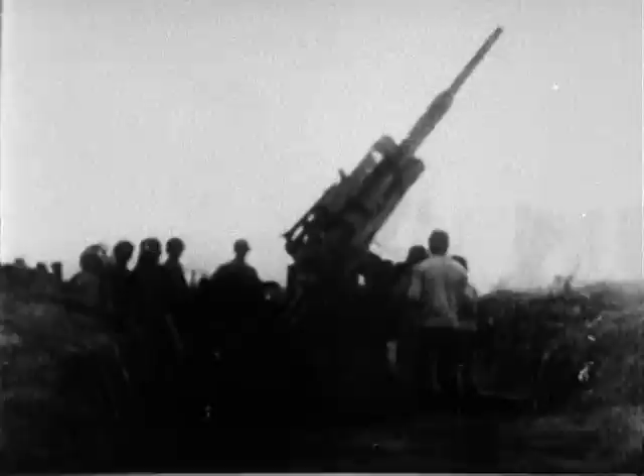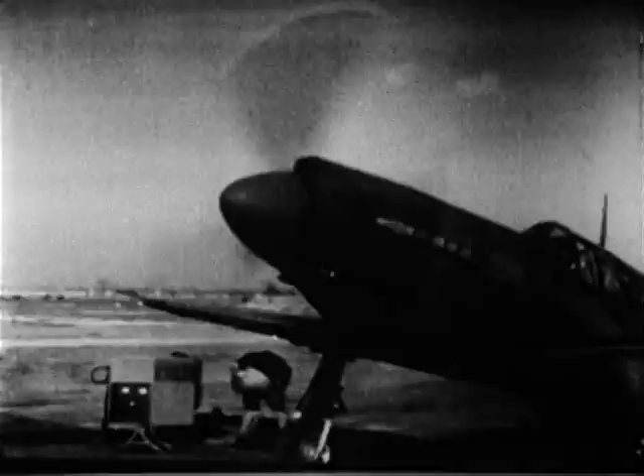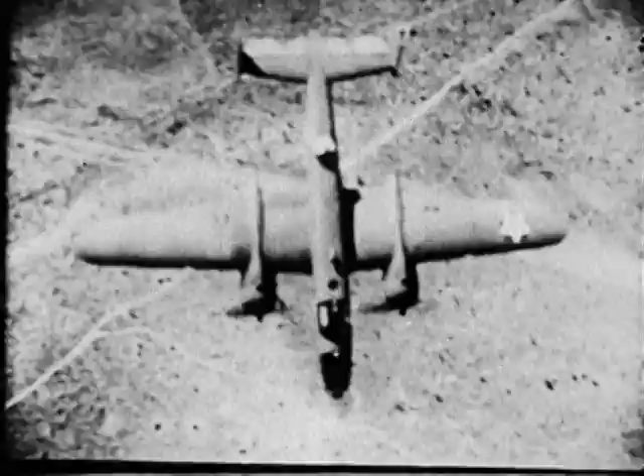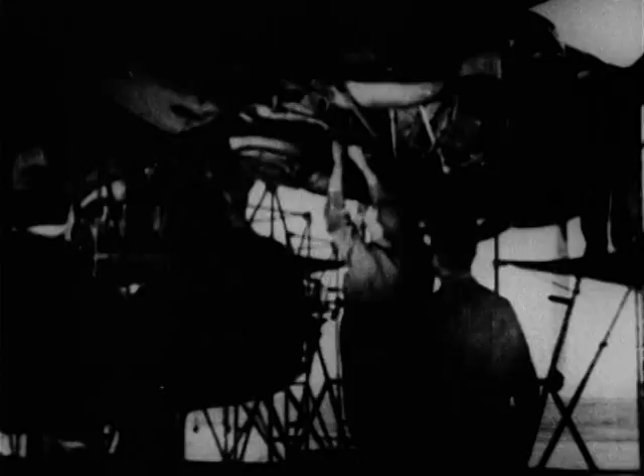All combat planes are equipped with gear-driven superchargers, which are built into the engines and driven from the engine crankshaft. These geared superchargers are effective up to medium altitude. At high altitude, the turbo supercharger is needed to provide additional pressure to maintain full engine power. With proper care in installation, maintenance, and operation, the turbo supercharger is extremely effective, reaching its full power and efficiency at 25,000 feet or higher.

This is the turbo supercharger installation in the B-17. Installations vary according to the different types of ships, such as the B-24, the P-38, the P-43, and the P-47, where it is submerged in the fuselage.

A turbo supercharger is driven by the terrific impulse of hot exhaust gases from the engine. It largely uses waste power.

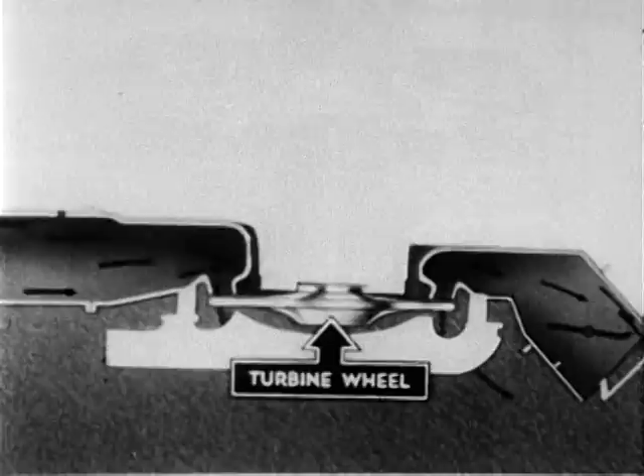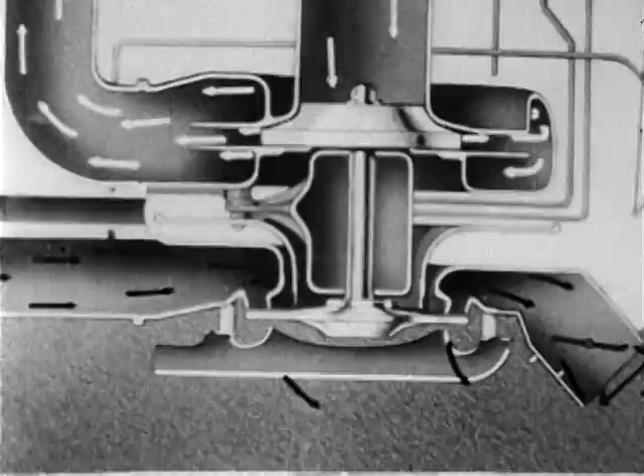Waste exhaust gases pour into the nozzle box, where they are directed onto a metal windmill or turbine wheel at 1,500 degrees Fahrenheit, with all the red-hot energy that implies. This blazing force spins the turbine wheel at terrific speeds, up to about 20,000 revolutions per minute. The turbo supercharger stands the gaff of almost impossible high-speed strains and stresses, and still performs its task at temperatures ranging from 1,500 degrees above to about 67 degrees below zero Fahrenheit.

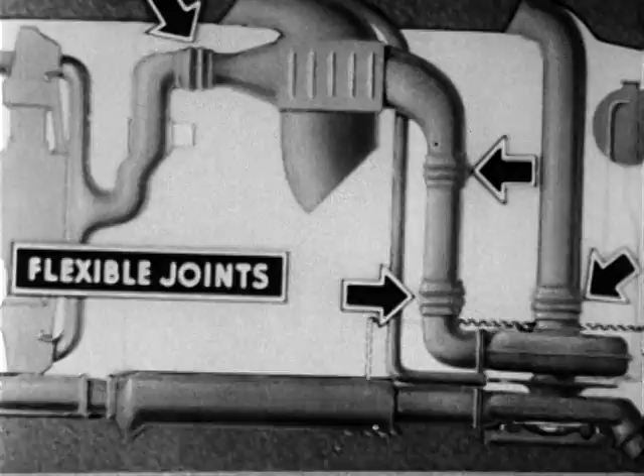The basic principle of all turbo supercharger installations is outlined in this diagrammatic drawing. Flexible joints are installed between the component parts to absorb vibration.

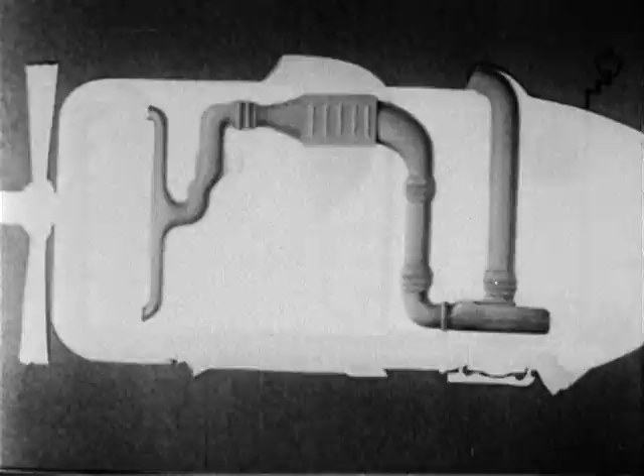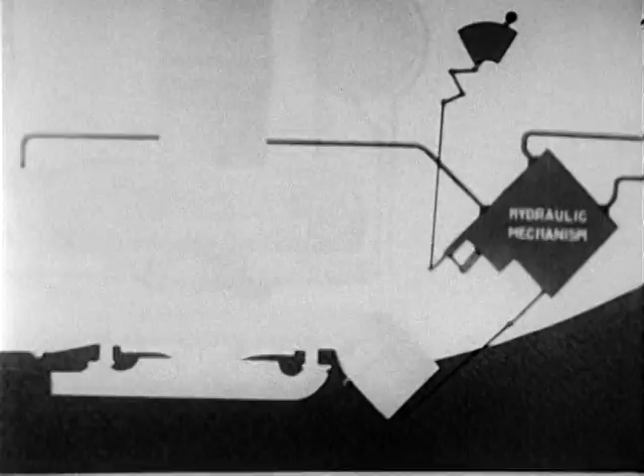For purposes of clarity, we will divide the system into 5 parts: 1, the induction system. 2, the exhaust system. 3, the ventilating or cooling system. 4, the control system. And 5, the lubrication system. Individual installations vary according to the different design of ships, but their functions remain the same.

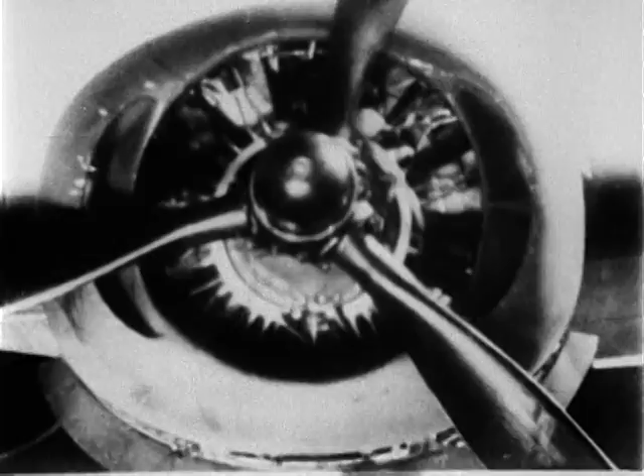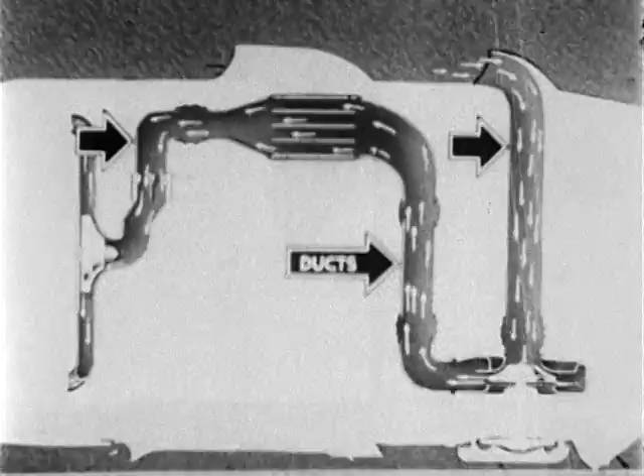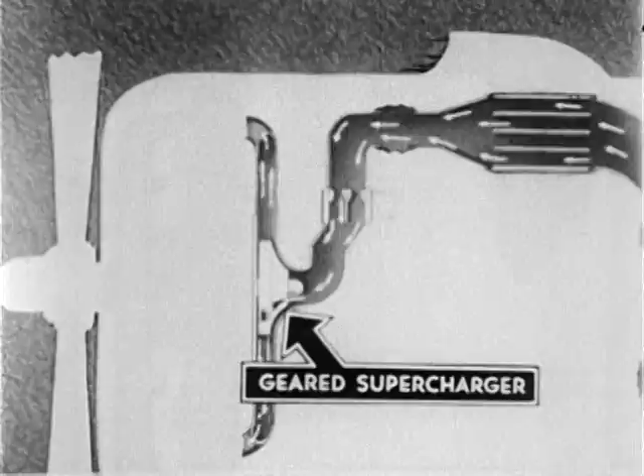The induction system comprises rammed air intake in the engine nacelle or in the leading edge of the wing. The speed of the plane rams air into these intakes and assists in keeping up pressure. Ducts carry this air to the compressor, where it is compressed and forced through the intercooler, and the carburetor to the inlet of the geared supercharger. The geared supercharger is used to do part of the required supercharging and to improve the distribution of the fuel charge to the cylinders.

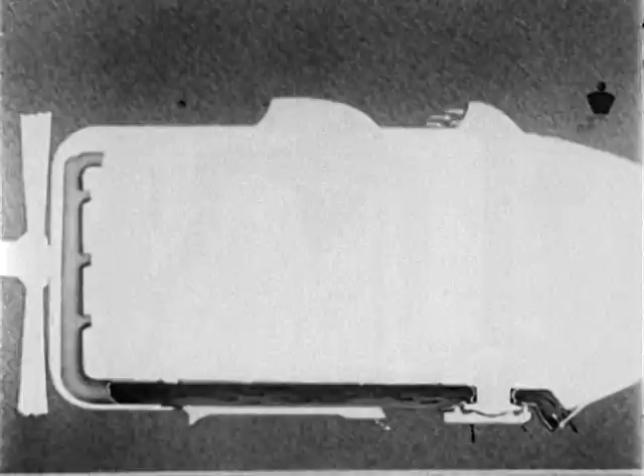The exhaust system takes the high-temperature exhaust gases from the engine to turbine wheels or out through the wastegate to the atmosphere. The cooling or ventilating system cools the supercharger parts, thus preventing damage due to the high-temperature exhaust gas.

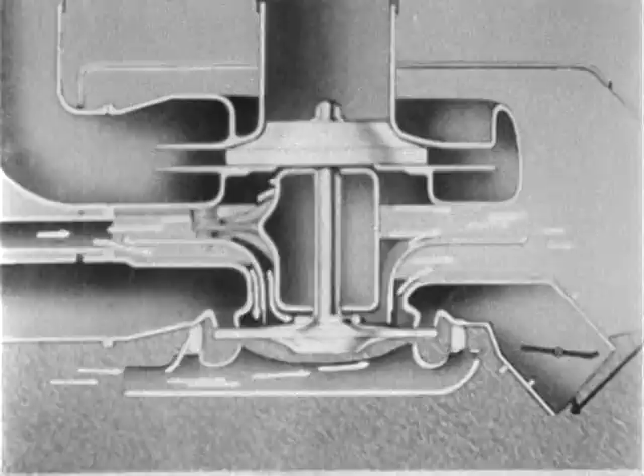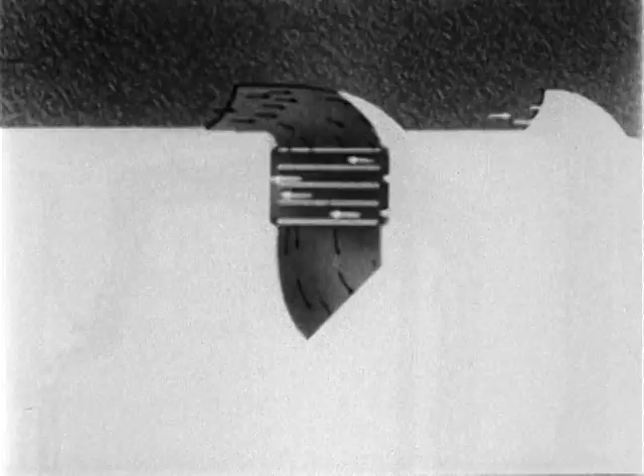Rammed air is carried through ducts to the turbo, where the stream is split by the baffle plate and cool air forced against the bearing housing, compressor casing, the back of the turbine nozzle box, and the back of the turbine wheel. Other ducts perform the same functions in relation to the exhaust stack shroud, which insulates the exhaust stack, and the air intercooler, which for proper combustion reduces the temperature of the air fed from the compressor to the engine. The intercooler cools air in the same way the radiator on your car cools water.

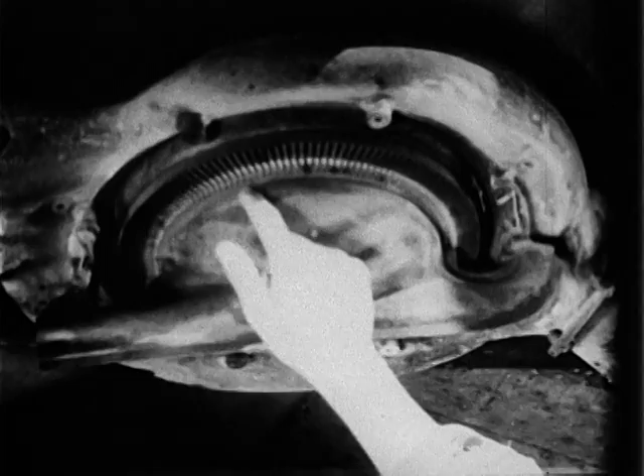The cooling cap supplies air to the rim of the turbine wheel to lower temperature of the wheel disc.

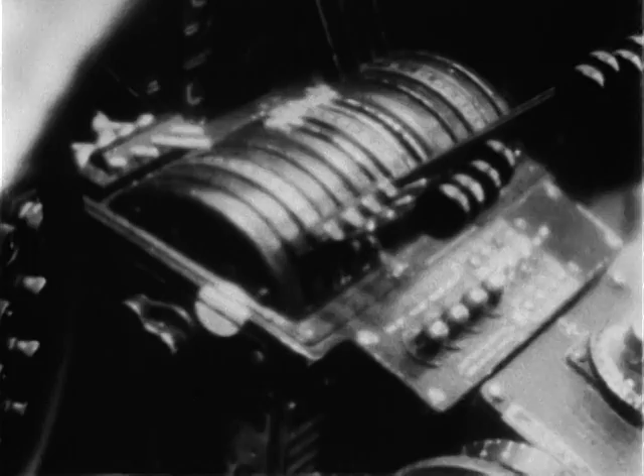The turbo supercharger is controlled by a hydraulic regulator, which operates the wastegate in response to pressure changes in the exhaust stack. The wastegate control is adjusted by a boost lever in the cockpit. The wastegate controls speed of the supercharger by bypassing the gases around the wheel. With the wastegate open, the turbine will idle. Closing it by degrees enables the turbo supercharger to operate at required speed.

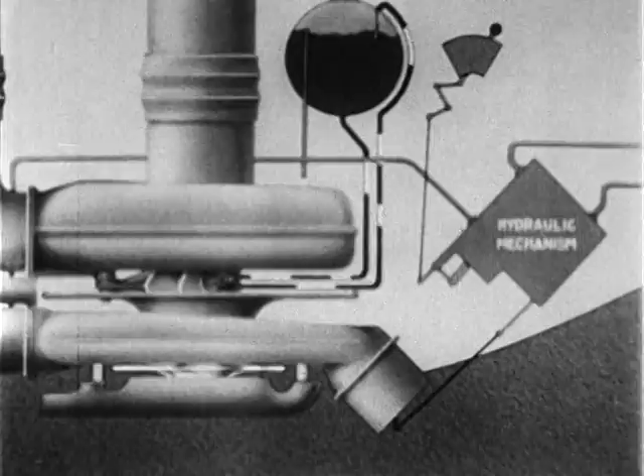Lubrication is accomplished by a gear-driven pump. One element of the pump takes oil from the tank and supplies it under pressure to the moving parts. The second, or scavenging element, returns the oil to the tank.

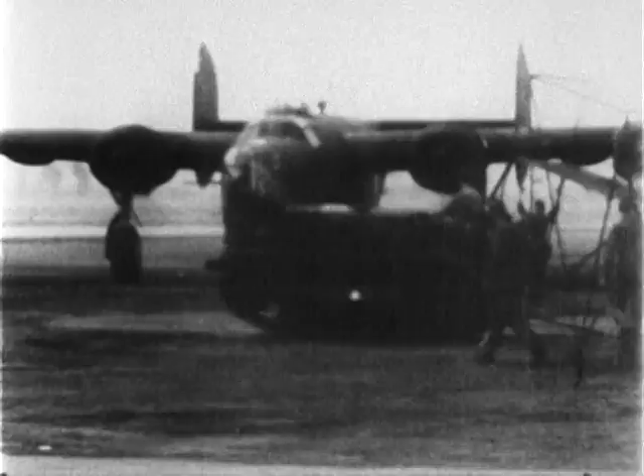When a ship comes in from a long, grueling flight, or even a routine operation, the pilot knows that the ground crew will assure the success of his next mission by a thorough inspection.

The inspection of the turbo supercharger installation is performed in accordance with Army Air Force's technical orders.

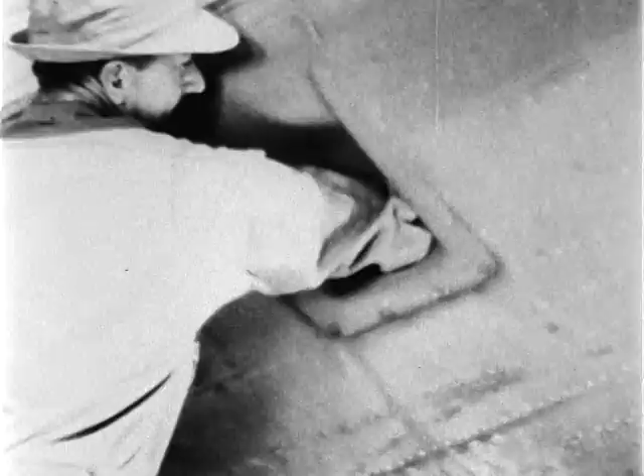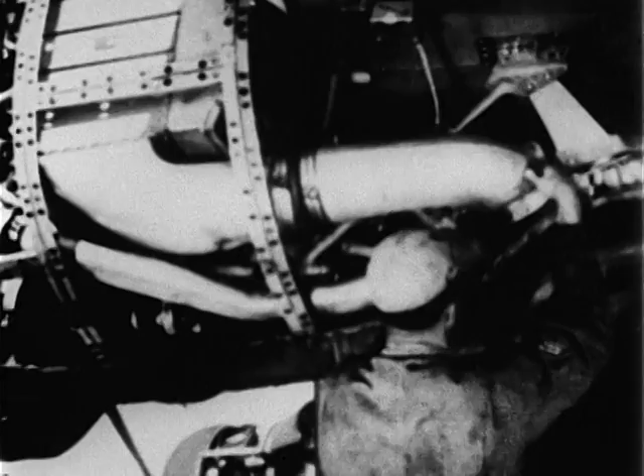Air ducts running from the nacelles or from leading edge of wing must be kept clear at all times. A piece of newspaper in a ram air duct will choke off cooling air, which is absolutely necessary for proper performance. Men are sometimes careless and step on louvers, blocking the flow of ventilating air. Ducting must be examined for broken connections, cracking, and chafing.

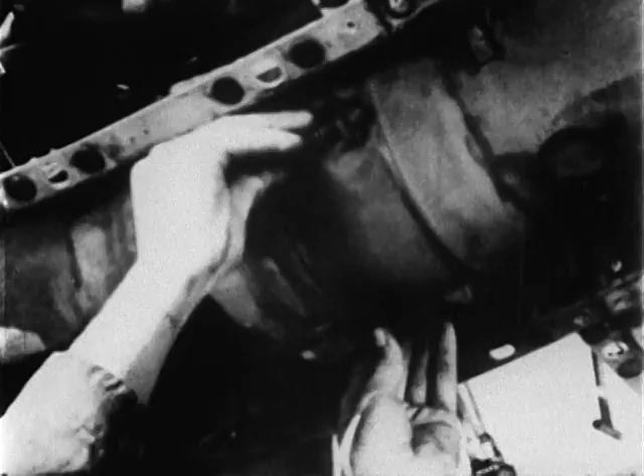The exhaust system is equally as important as the air feed. All joints in the exhaust system must be inspected for gas leakage, with special attention to flexible joints. Look for signs of overheating and leaks around exhaust piping. One small leak might rob the engine of that vital extra few miles an hour which marks the difference between victory and disaster. Leakage can be detected when the engine is started.

In the lubricating system, check oil level in the tank. Keep all foreign matter out of oil. Note and record excessive oil consumption. Keep oil tank vent clear. Report signs of oil foaming or mist. Inspect all pipelines and connections, including turbo supercharger regulator, for oil leakage and security.

When inspecting the control system, check free movement of regulator in relation to open and closed positions of wastegate. Check free movement of boost control in cockpit. Be sure turbo regulator locking device operates correctly.

The pressure regulating pipe should be disconnected at both exhaust manifold and regulator. Blow air through and record any water condensation, carbon, or other foreign matter. Water will freeze and foreign matter clog the pipe. Test pipe to make sure there is no leakage. See that regulating pipe orifice in exhaust manifolds is free from carbon or corrosion.

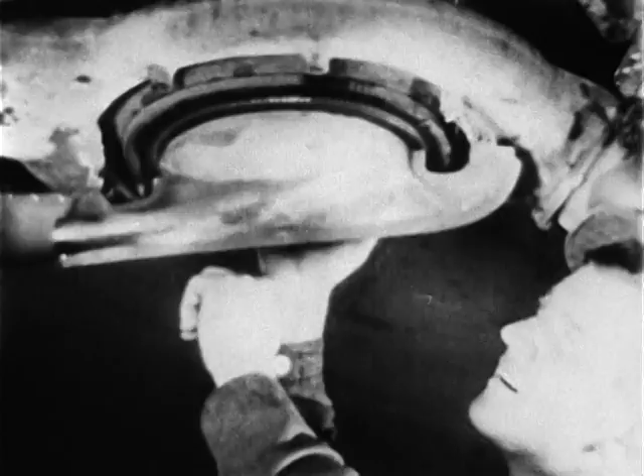Inspect turbo supercharger to see that it is firmly in place. Inspect nozzle box for deformation or cracking. Turn turbine wheel by hand, feeling for any obstructions or tight spots. Listen closely for strange noises or rubbing, which might be caused by foreign matter on back of wheel. Examine wheel for signs of overheating.

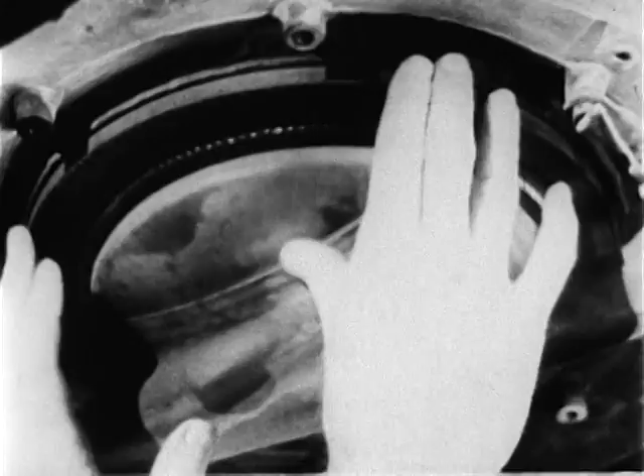Inspect buckets for alignment and deformation. The cooling cap is always taken off and is replaced by a cover cap to protect the turbine wheel.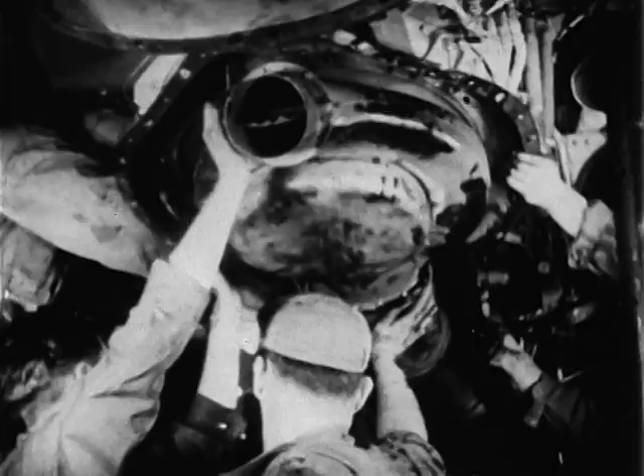The turbo supercharger is carefully lowered from the plane and starts its journey to the overhaul depot.

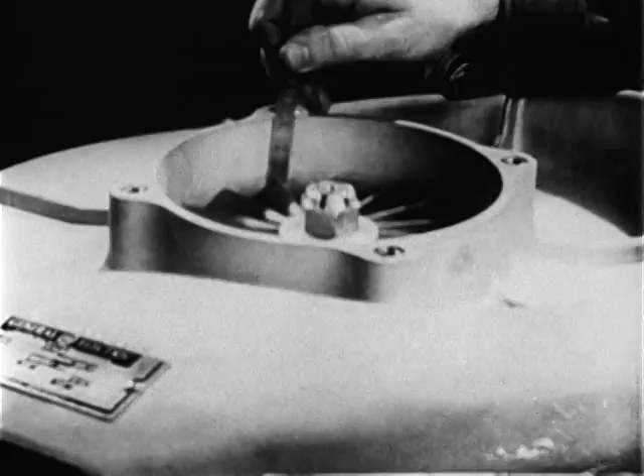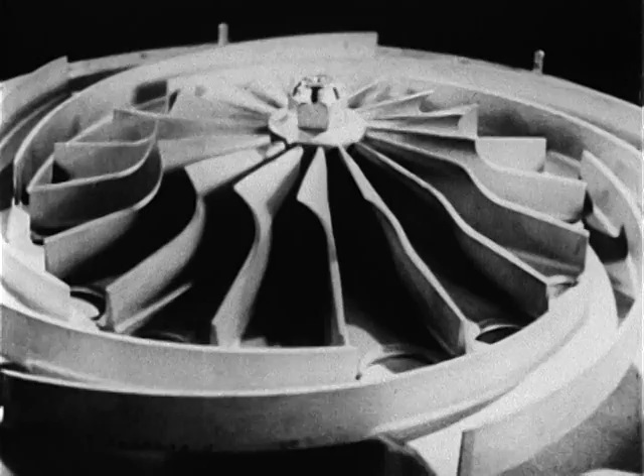At the depot, the supercharger is placed wheel down on a special stand for disassembly. After proper clearances are taken, the rear compressor casing and gasket are removed, revealing the impeller and diffuser. The impeller is on the same shaft as the turbine wheel and discharges air through the diffuser to the compressor casing, which collects the compressed air and feeds it to the engine.

After removing the impeller, the front compressor casing and diffuser are taken off as a unit. Note that we are working from rear to front, as the turbine wheel side is always called the front, regardless of position. This disassembly appears very simple.

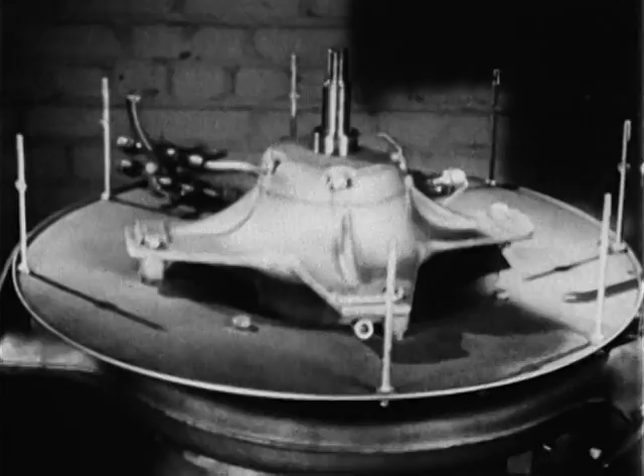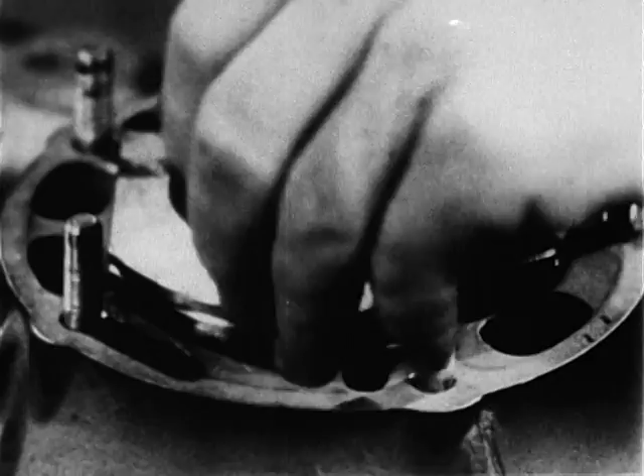Actually, it is a long and careful process, which we will demonstrate by the more detailed removal of the rear bearing and its housing. Safety wires are cut and the 3 retaining screws taken out. The rear bearing clamp washer is lifted off, and the same 3 retaining screws inserted in the threaded jacking holes in the flange of the rear bearing housing. Each of the 3 screws is turned a little at a time, one after another, thus evenly jacking out the rear bearing and housing. The rear bearing is a ball bearing.

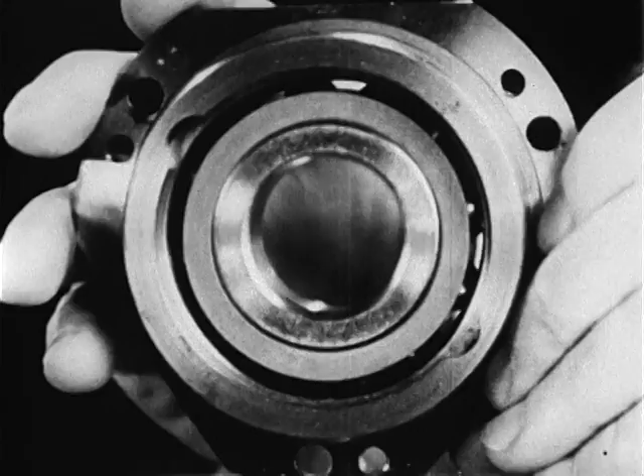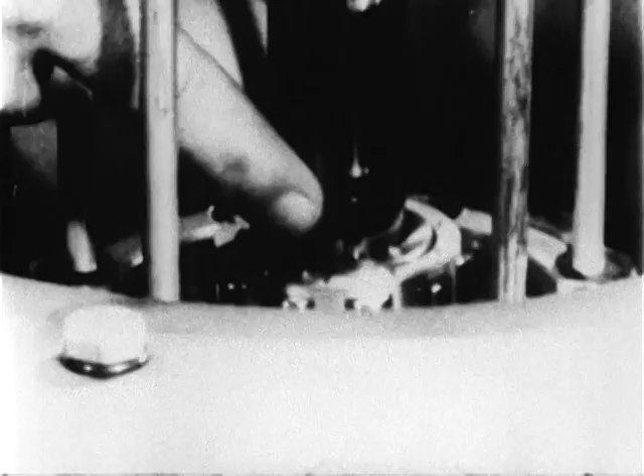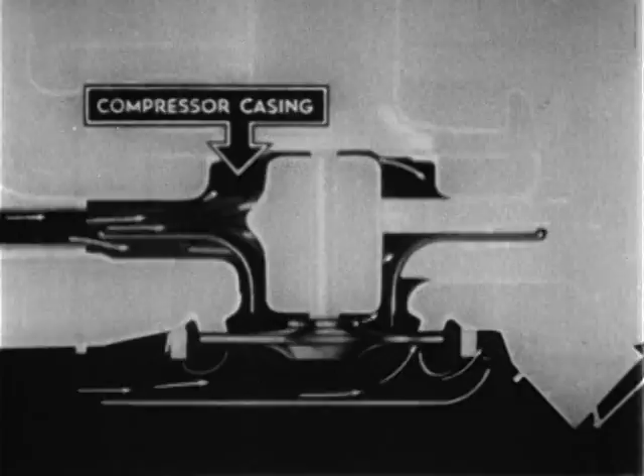Next, the bearing and pump casing is removed. The oil pump is operated by this drive sleeve, which is locked onto the shaft with the Woodruff key. Then the front bearing, which is a roller bearing, is removed. The baffle plate is a radiation shield and also divides and directs rammed cooling air against the bearing and pump casing, front compressor casing, the back of the turbine nozzle box, and the back of the turbine wheel.

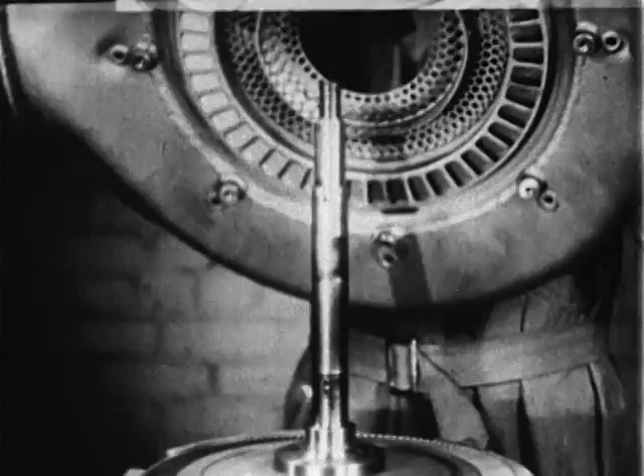A series of blades in the nozzle box directs the high-temperature exhaust gases onto the buckets of the turbine wheel. These buckets are separate blades driven into slots in the wheel.

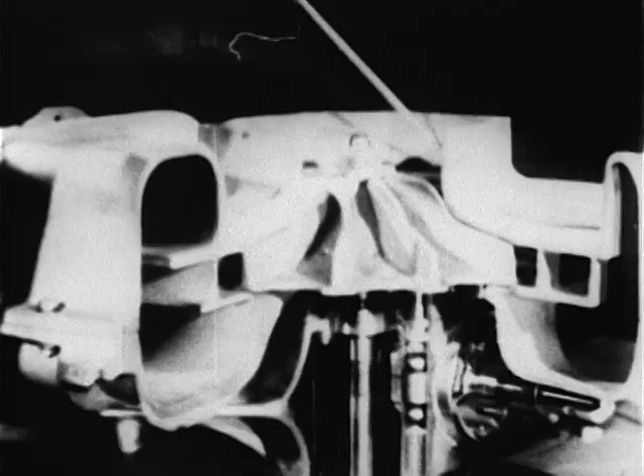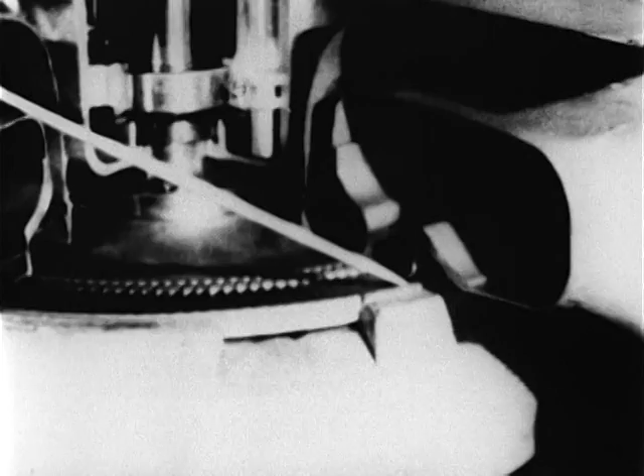During disassembly, 5 clearances are taken: 1, annulus. 2, blade side of impeller to rear compressor casing. 3, plain side of impeller to front compressor casing. 4, pump backlash. 5, between turbine wheel and nozzle box.

Here are all the parts of a turbo-supercharger. The disassembly you have just seen in a minute or 2 actually takes a skilled mechanic several hours.

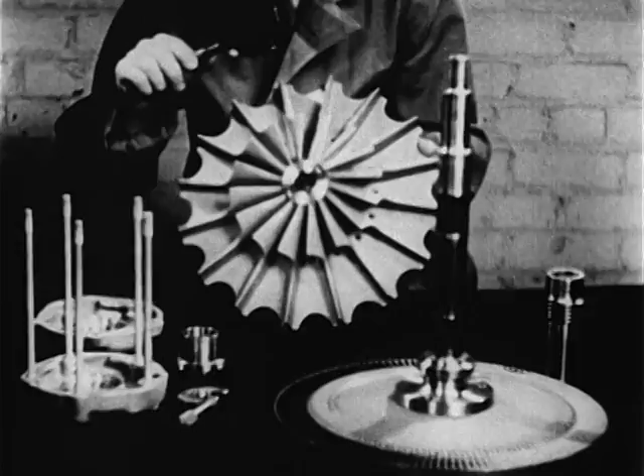After disassembly, careful inspection is made of all parts to determine those which are to be repaired or replaced.

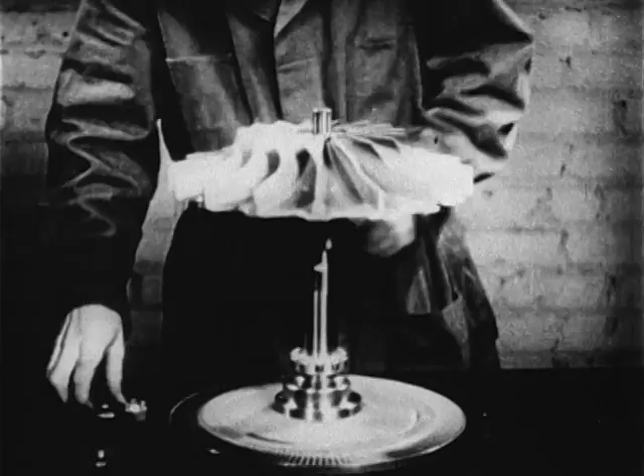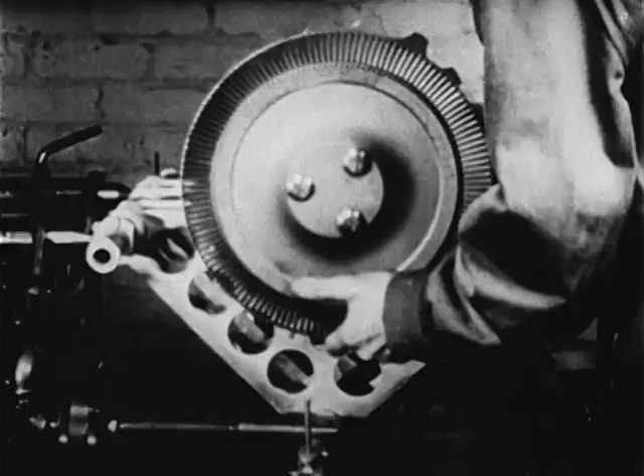One of the most precise repair processes is proper balancing of the rotor unit. This balancing is necessitated by even minute differences in the parts as placed on rotor assembly. The rotor unit is placed on the balancing stand where it is dynamically balanced. Running at speeds in excess of 20,000 RPM, and in any position which the plane flies, calls for more delicate balancing than a fine watch.

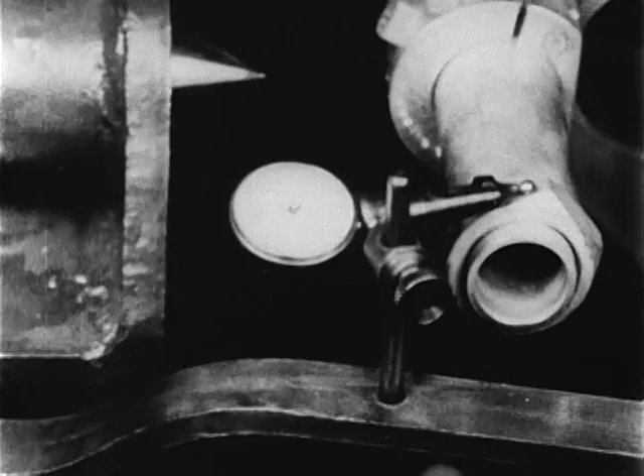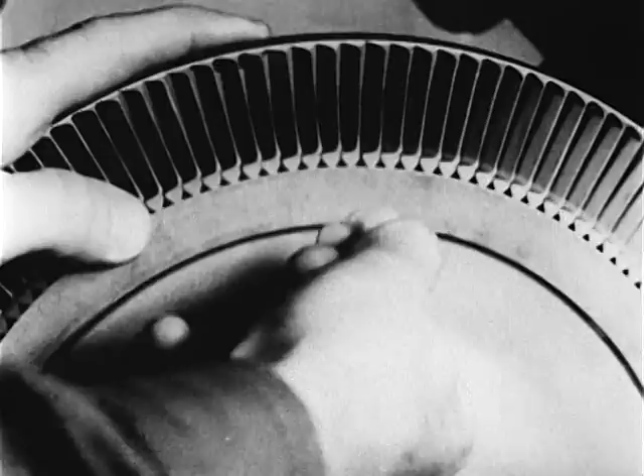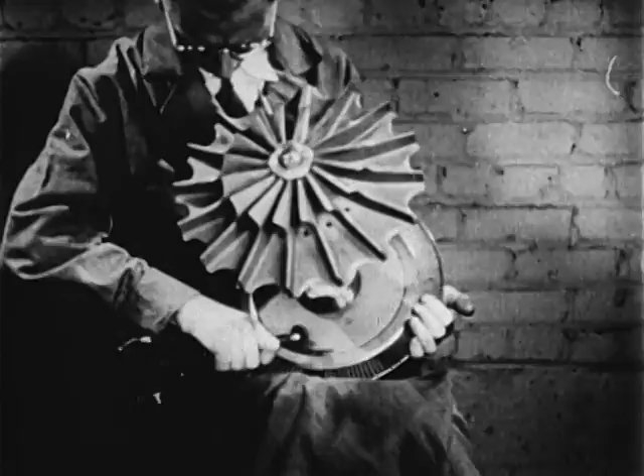A daub of clay is placed on the wheel, then shifted to find the point at which vibration becomes negligible. Then, from the diametrically opposite side of the wheel, enough metal is removed to offset the weight of the clay.

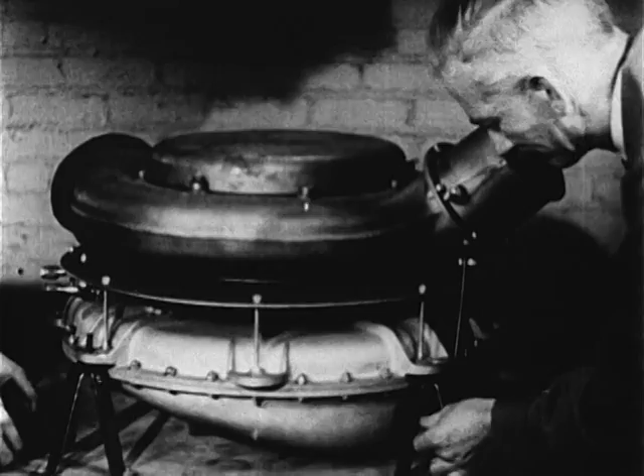The same balancing procedure is used on the impeller end of the rotor unit, and enough metal is removed to balance the impeller. After balancing of the rotor and assembly of the supercharger, it is ready to be returned to the flying field.

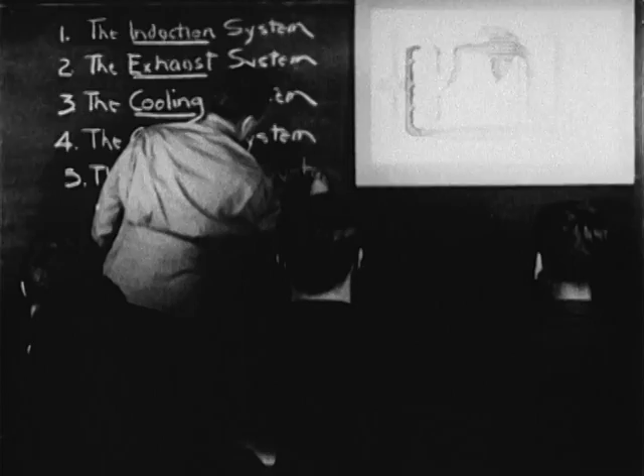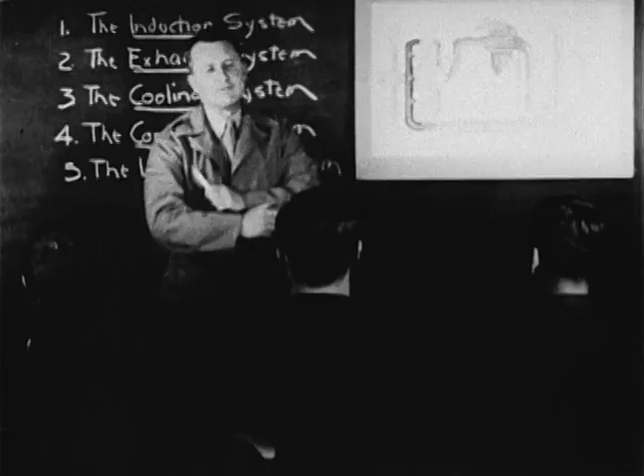Like every other part of a modern military airplane, the turbo-supercharger must be understood by pilots, who should remember important instructions regarding control. Before starting the engines, be sure that the turbo-supercharger is in the off position.

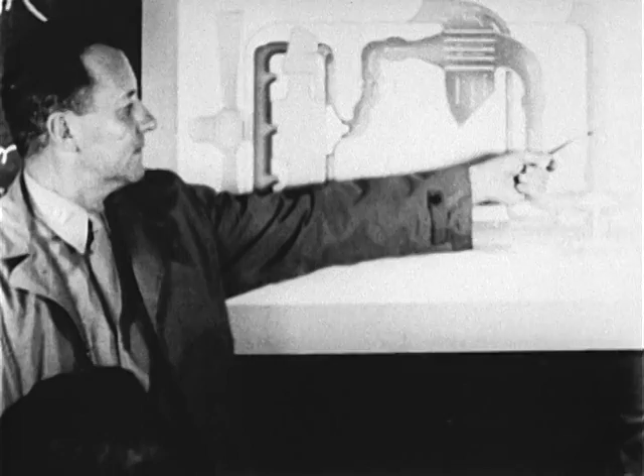No provision is normally made to supply engine air except through the turbo, its ducting, and intercoolers. Therefore, considerable resistance will be imposed on airflow to the engine when the turbo regulator is in the off position.

In order to obtain sufficient manifold pressure for takeoff power, it is necessary on some airplanes to use a small amount of turbo boost. Close the wastegate a little.

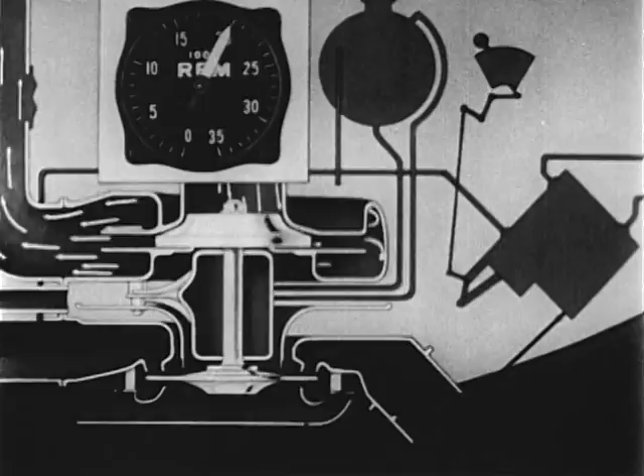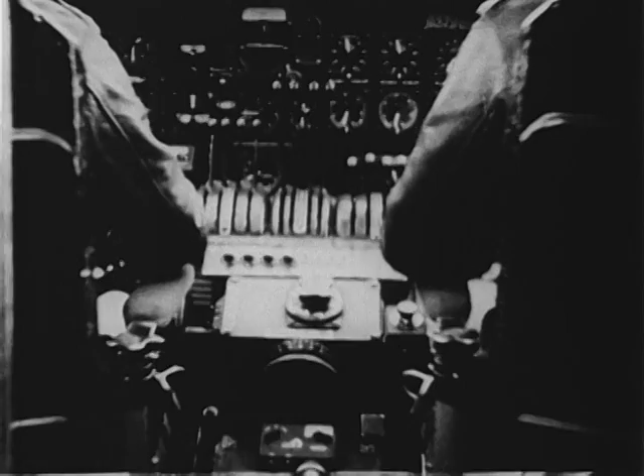Tactical requirements may dictate using military rated power for a period not exceeding 5 minutes. Climbs are usually made with about normal rated power. Small adjustment of the turbo control may be necessary during climbs to keep manifold pressure at the desired level.

For low altitude, low power cruising, when the geared supercharger is enough to provide proper manifold pressure, reduce engine throttle to maintain the desired manifold pressure.

At high altitudes of more than 20,000 feet, it is not practicable to operate at very low engine speeds and power. Turbo superchargers should be kept engaged at all times when induction system icing may be encountered.

Above approximately 25,000 feet, manifold pressure should be reduced in accordance with the instructions given for each type of plane, to avoid overspeeding the turbo supercharger.

For gliding and approach for landing, the turbo regulator is set approximately at maximum cruise position to ensure power to go around the field again if necessary.

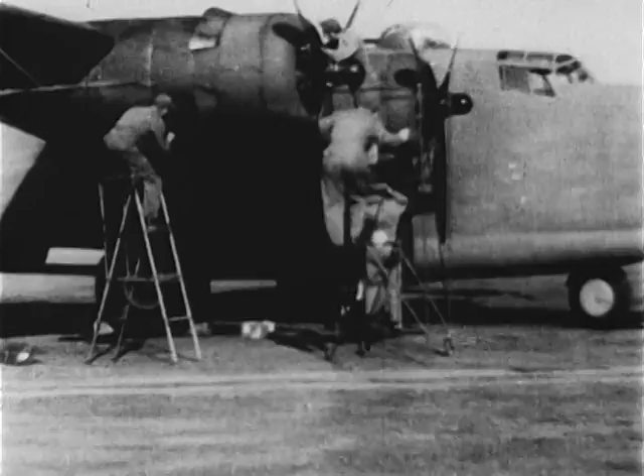The performance of ships equipped with turbo superchargers is a matter of teamwork between ground crews and pilots. It is not necessary for a pilot to learn all the mechanical details of construction, but it is for him to know what he can expect from a turbo supercharger when he needs its assistance to win the fight, save the lives of his crew and himself.

The men who fly these powerful planes are going to depend upon their turbo superchargers in emergencies which will test all their skill, strength, and courage. Operation and control are largely automatic, but there are certain times when the pilot needs power and needs it instantly. These times occur under stress of actual combat conditions, and his reaction should be instinctive.

The pilot will depend upon this master of the skies to give him the edge of speed and maneuverability, which means the difference between defeat and victory in the substratosphere regions of the sky.

It is with enormous pride in American scientific invention and mechanical ability we look at our interceptors and pursuits, which can get on top of anything that flies. It is with a feeling of grim satisfaction that we know our bombers are able to shoot down or escape from anything the enemy can put in the air.

This edge is held only as long as the turbo superchargers on each and every one of these planes is kept at the peak of performance. They must answer every demand that the pilot makes. It's up to the ground crews to keep them flying, and flying higher and higher. Ride the master of the skies to victory.